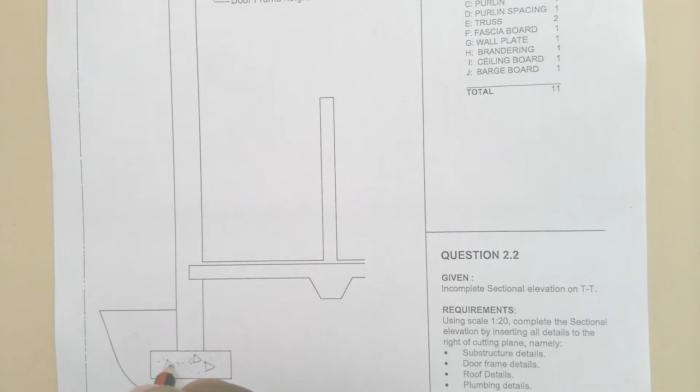Okay guys, we now need to focus on a detailed section through an external door and a strip foundation. I'll start from the bottom. Here we have our foundation, which we need to use concrete. So by drawing those triangles, I'm saying we are using concrete. Then we need to tap all that to make these dots, because it then says this is what? Concrete. Then we move on into our slab.

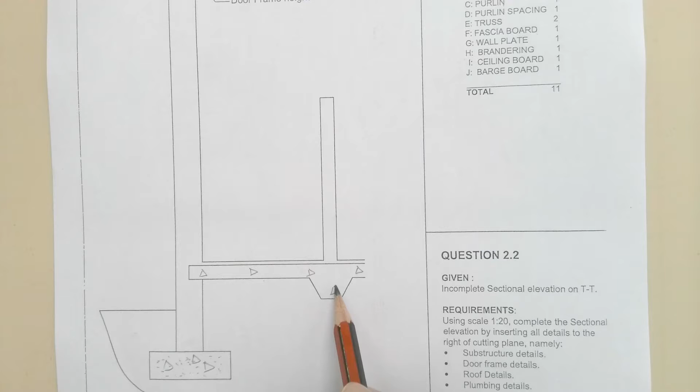Our floor slab also uses concrete. Now this here is a foundation for your internal wall, because that is external. This is the external wall. That's why they've used that type of foundation. But this type of foundation can also be used for the internal wall. This is another type of foundation that we can use. So then we tap in there, in there, and in there. Then we say our floor slab has been hatched.

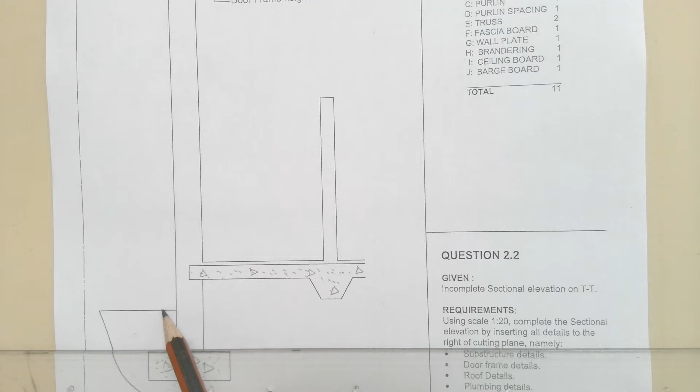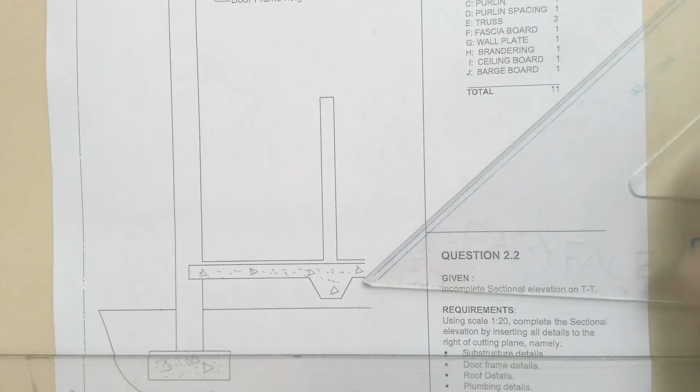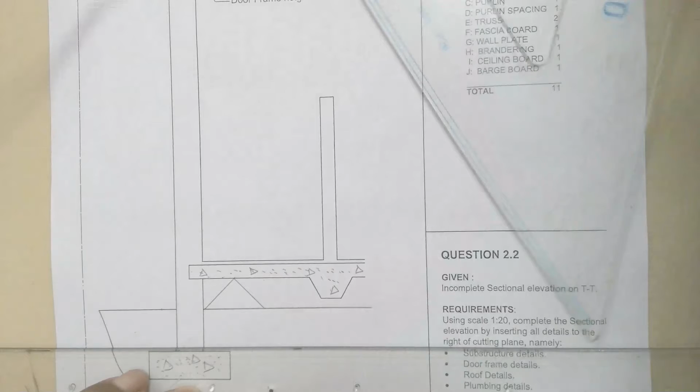Now, we need to look at this line here. This line is your NGL line. On the inside, because they have not separated this for us, we draw a line that separates your undisturbed earth and your hardcore fill. Then on the hardcore fill, we use a 45-degree set square to draw our hardcore fill, and you use that side 45 degrees, and this cannot be done freehand. We must always use our 45-degree set square. Then we carry on until we finish everything on our hardcore fill. Obviously you'll carry on to that side.

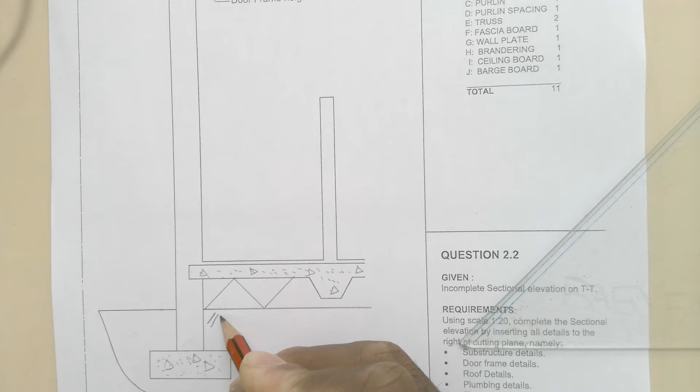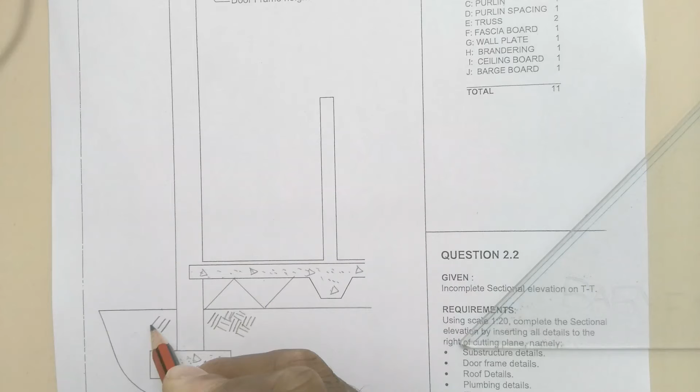Now we get into our undisturbed earth. Undisturbed earth, we also use 45-degree angles, but 45-degree angles in freehand. 3 lines. 1, 2, 3. 1, 2, 3. Obviously, you'll carry on doing the same thing. So you do the same thing on the outside. 45 degrees. 1, 2, 3. 1, 2, 3. Obviously, you have to fill that gap up. Now, finish with that.

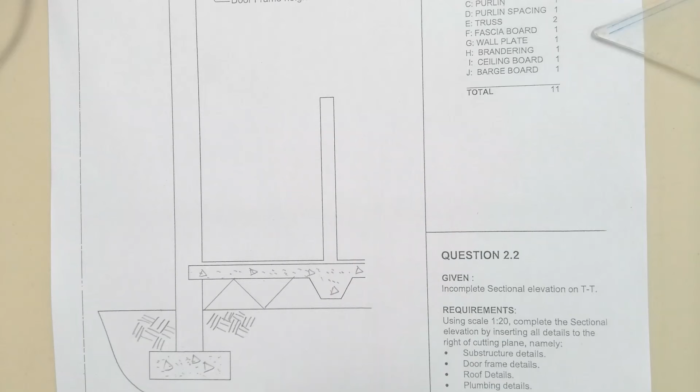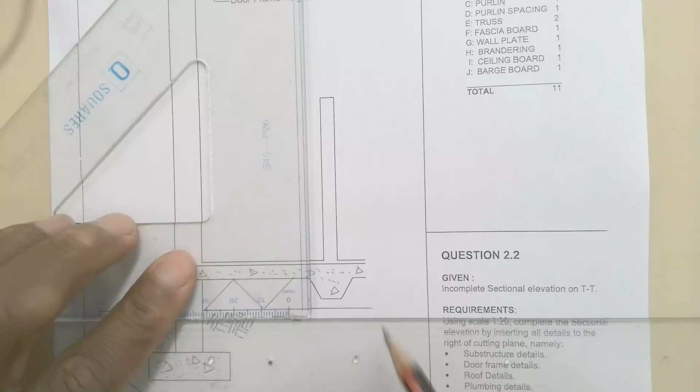Now, let's get into our floor slab. So, what happens with regards to the floor slab and our screed, to be specific? This here is not supposed to be hanging there. The wall needs to be touching your floor slab. The internal wall must be touching the floor slab, which is why I draw this projected to the floor slab, and that must be projected to the floor slab. Now, that is your screed up to there.

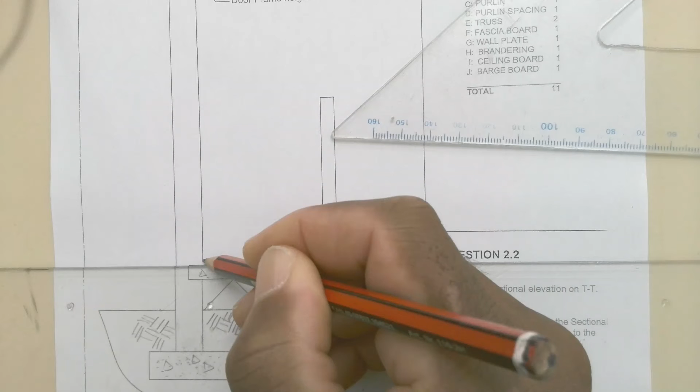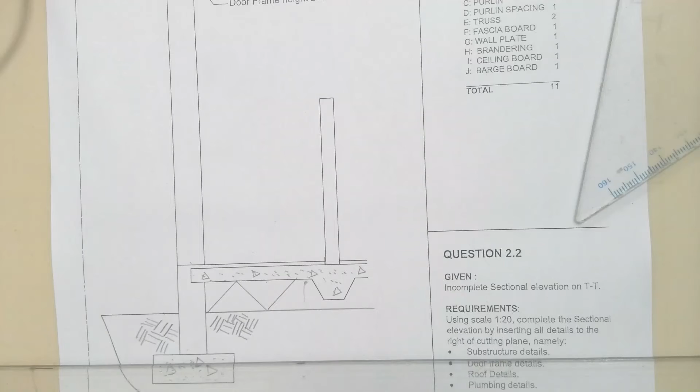Now, where we're going to have our door, this part here, the screed is now extended in that direction. The screed level must be on the same level as where we're going to place our door. That's why we don't close that down as compared to that there. Now, we need to hatch the walls here, common brick, in terms of cutting the wall. So, it's 1, 2, jump, then we have 1 and 2. So hatching is complete.

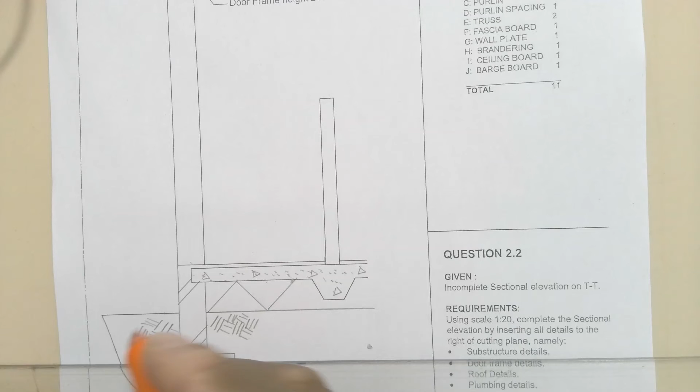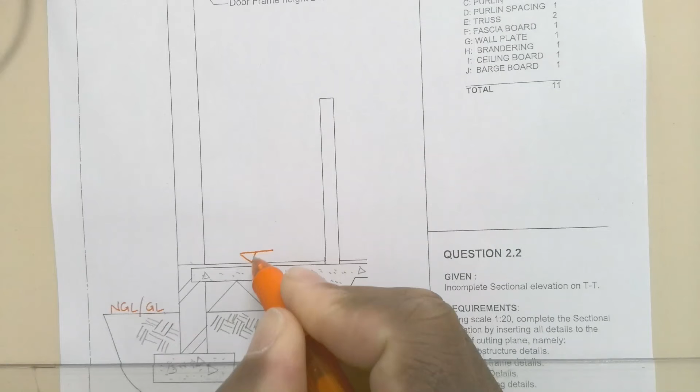Now, here we have NGL, natural ground line, or we can call it a ground line. That's enough. Then here we can get an arrow and a leader. We are pointing that this is finished floor level, meaning that it's FFL.

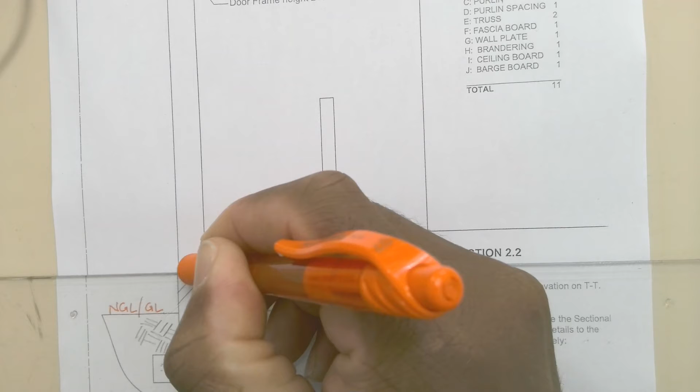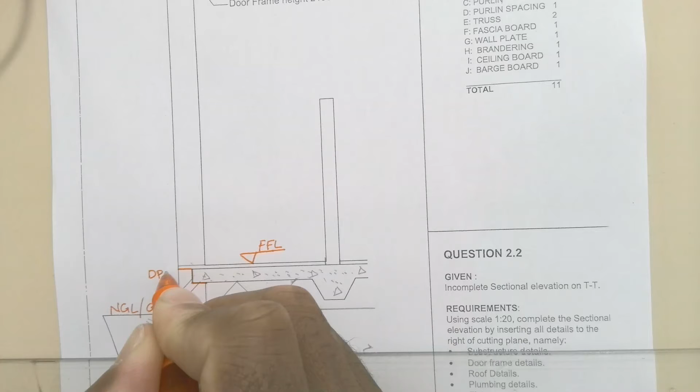Now we need to put in our DPC. DPC comes in here on your floor slab. That and that, plus the vertical line, plus the vertical line. Now this is your DPC. Then you label DPC on the outside. So that has been completed.

Now we need to hatch the internal wall. This wall here. Internal wall. 1, 2. Again, 1, 2.

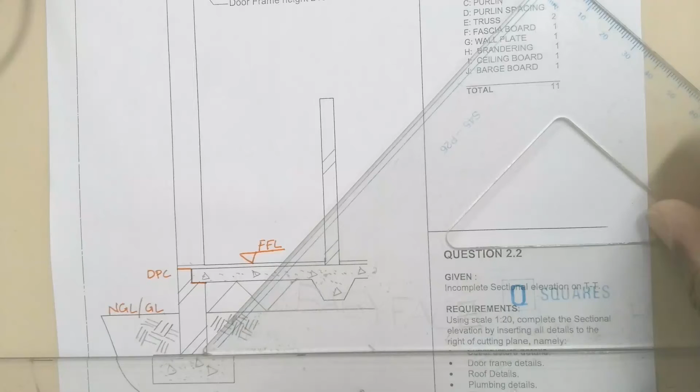Now, this is a typical wooden door frame. The actual size of the door frame is 135, 67, 45, and 55. I've used the scale of 1:20 because your detail section will ask you for a scale of 1:20. So I've divided these dimensions by 20, which gives me 6,75 for that. I've circled 6 because I'm going to use this 6.

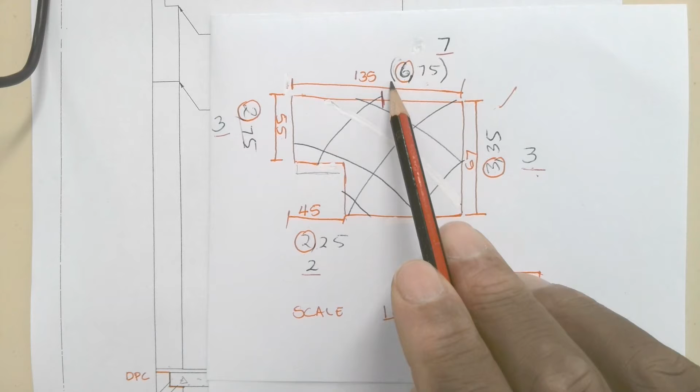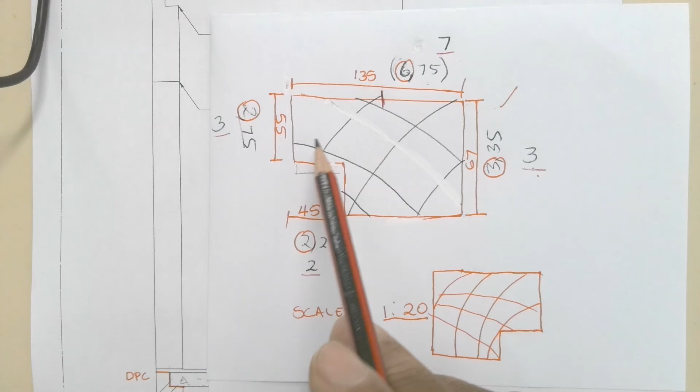67 gave me 3,35. I'm going to use 3. 45 gave me 2,25, so I'm going to use 2. And then 55 gave me 2,75, and I'm going to use 2. Although when you round off, you're getting 3 there, you're getting 7 there, you're getting 3 there, and you're getting 2 here. However, there's a reason why, which I will explain once I get into the wall, why I'm choosing to use this 6, 2, 2, and 3.

Now, it can be positioned like this in this particular drawing. So if we position it like this on this one here, it means it's going to open outwards. If it's positioned like that, it means the door is going to open inside the house. Okay, so now let us draw this one here, which I'm saying I'm going to use for external door opening.

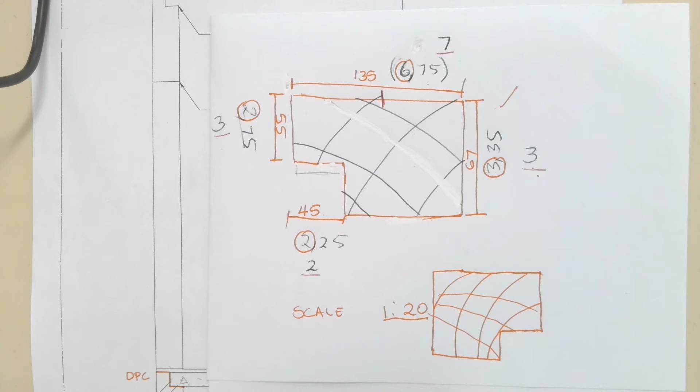So the size of my wall is 10 millimeters, right? So if I use 6, it means I'm going to be doing 3 on the left and 3 on the right hand side. So I need to measure half of 10, which is 5, so that I can get my 3 on the other side. 1, 2, 3, and then 3 on the other side. 1, 2, 3. So those lines now can be drawn down to the screed. For now we need 2 lines only. So it means I've used this 6 here. So 6, I've got 3 on either side.

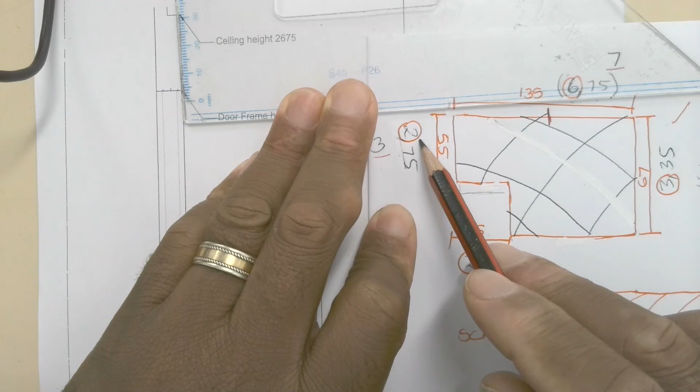Now this here is 3 millimeters, right? So we're going to measure 3 millimeters coming down. That's 3, that's the first one. And this one here, I said I'm going to use 2. So now, using the 2, I'm going to measure 2 millimeters.

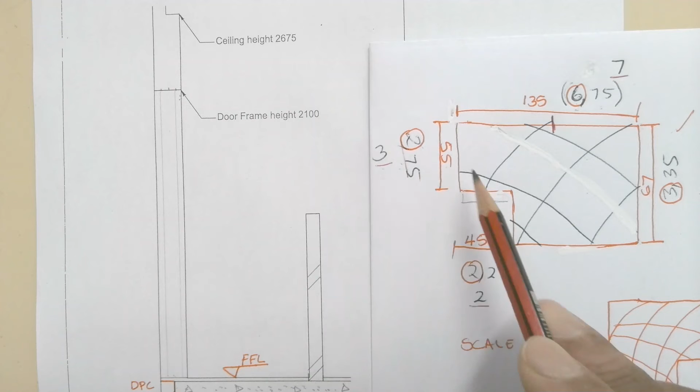So, why did I choose to use 2 here and 3 here? Because if I round off here, I'm getting 3. If I round off here, I'm getting 3. So it means I was not going to get that distance, because then it becomes one and the same thing. That's why I use the 2, and that's why I use the 3 on that side. So let's continue, because we want to complete this as quickly as possible.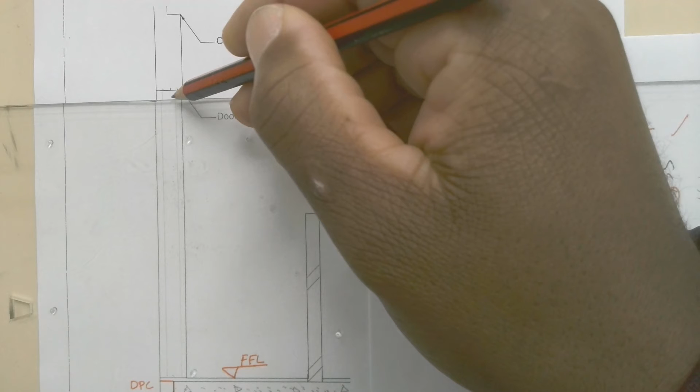So this is projected across, and we also project that. Okay, now this here is 2 for that part here, just 2. So from the left hand side to the right hand side, I need to measure 2, and that is 2. So it means if I draw a vertical line, it comes up here. So at the moment, I've got a rough sketch of my door frame.

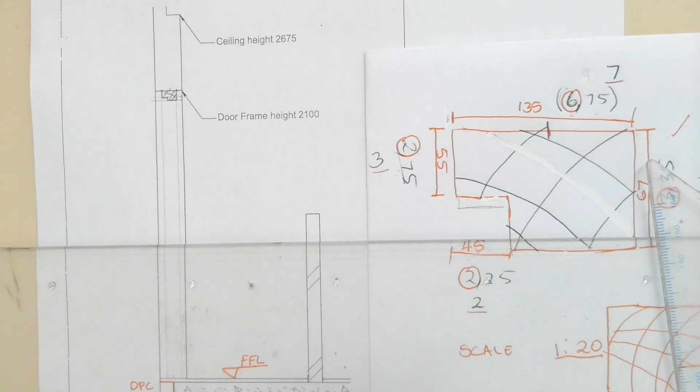Now this is my wooden door frame, which of course, to show that it is wood, hatching freehand. And then just one more line that I need there. Now this is my wooden door frame. Then I need to make these other lines dark coming down. One, the door frame; this one here at the center, 2; and this one here, number 3.

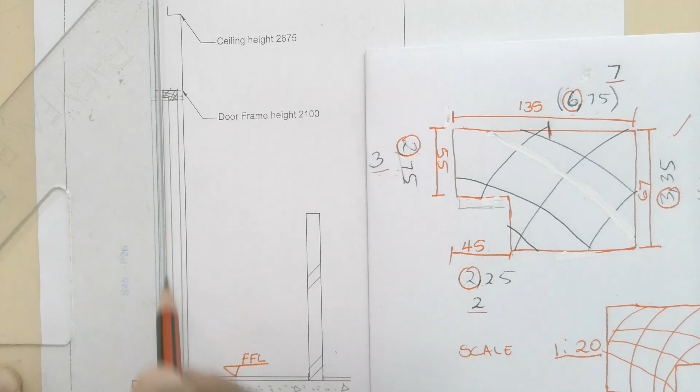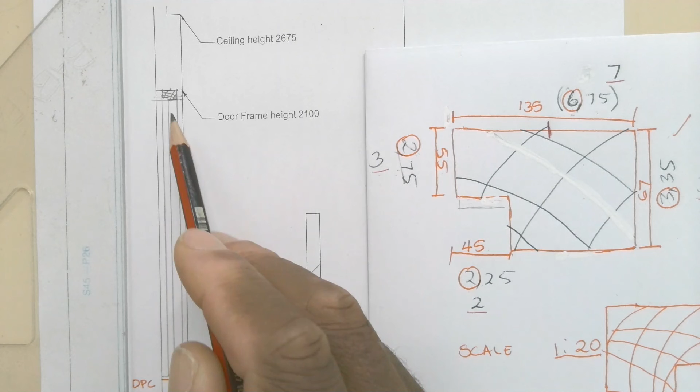Please take note that it does not come to the floor slab. It only ends on your screed. That's the reason why you have to draw the screed first, so that the door can open. Alright, then this frame is saying that the door opens towards the outside.

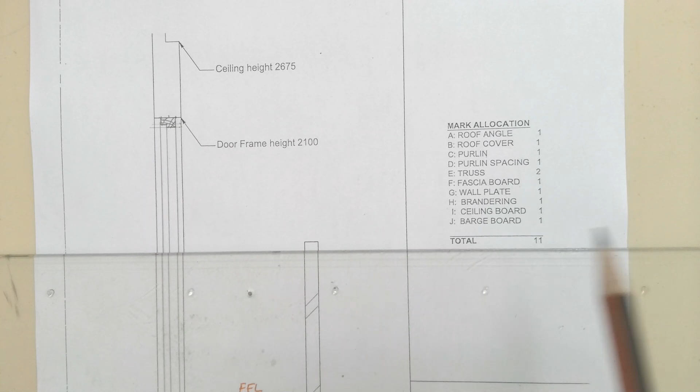Now, above any opening, a door or a window or an arch, we need to have a precast concrete lintel. Because it's not given to us, we're going to assume a good proportion, not more than 5 millimeters. Let's assume that is our lintel height. Now, because it's an external wall, we've got to show 2 lintels. You may use one, but we've got to show 2 lintels because this is a load-bearing wall. Then, because it's a precast concrete lintel, you can have the triangles and make the dots, and that becomes your concrete lintel.

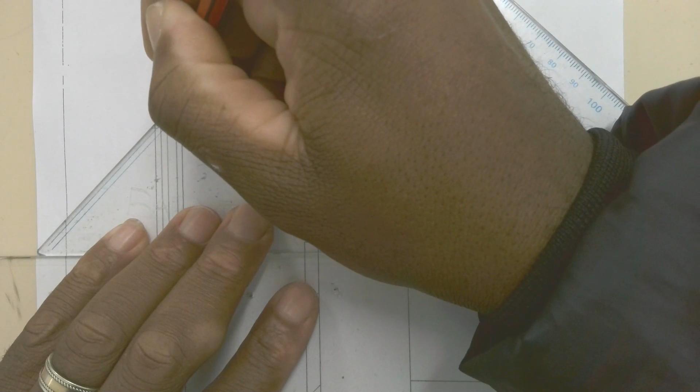Now here, on the wall above the concrete lintel, we need to show hatching of the wall, which is also known as sectioning in common brick. And this is how we show an external door. Thank you for watching.